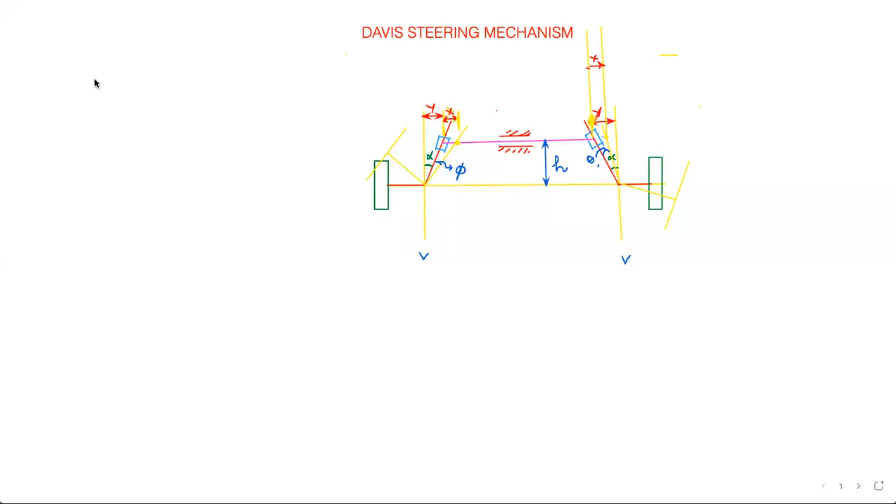So initially we have a few things to consider. Out of those, I will say that tan alpha from the initial condition we can write down right away. Tan alpha is y by h, opposite by adjacent, right? So y by h is tan alpha. Looking at either sides of the wheels, you can make this statement.

And then you should see on the left hand side, with respect to the vertical yellow color line, the final position is alpha plus phi. In terms of angle, the final position is alpha plus phi. I'm just going to make this angle look clear for you from initial to final position, and you call this angle alpha plus phi.

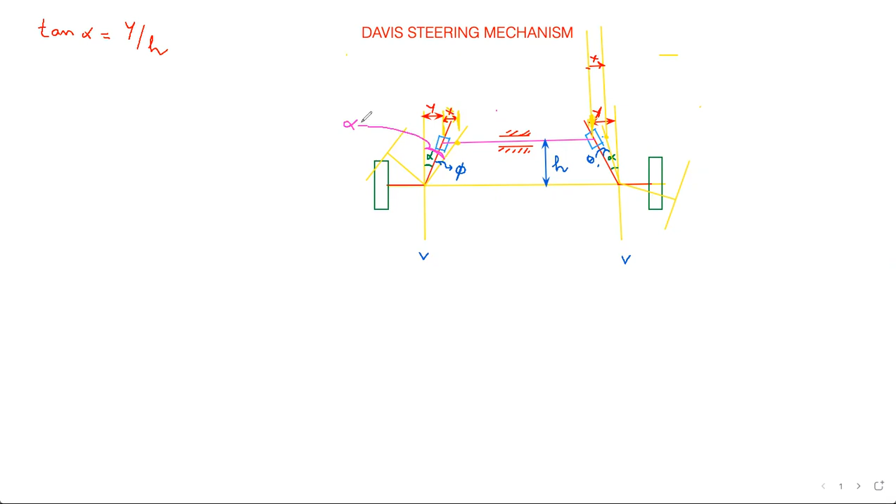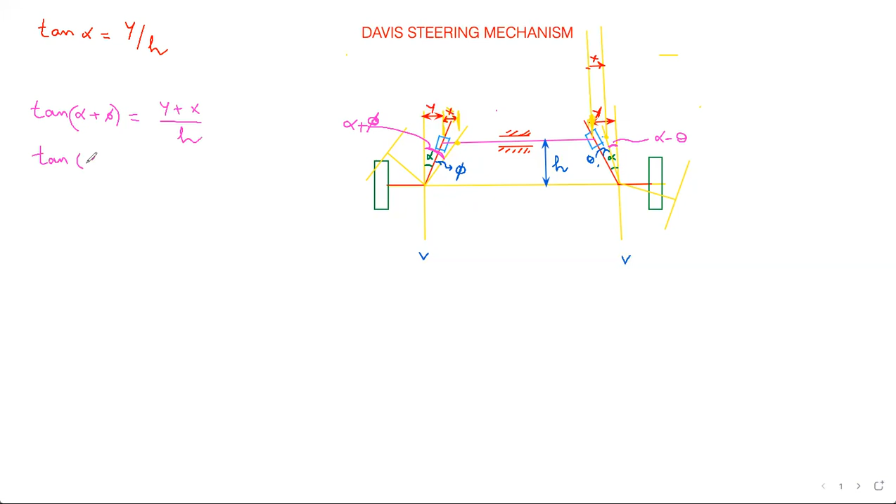And here also, from the vertical to the final position, you call it alpha minus theta, right? So now the next thing to do is tan(alpha plus phi), which is equal to opposite, which is y plus x, divided by h. Similarly, on the other side tan(alpha minus theta) will give you y minus x by h.

Now we are going to do the tan(A minus B) formula. So it will be tan A minus tan B divided by 1 plus tan A tan B, which is equal to y minus x by h.

Now what is tan alpha? From the first case, I have written y by h, right? So right away write y by h minus tan theta divided by 1 plus y by h tan theta, which is equal to y minus x by h.

Now we can do some simplification, and finally I have got this equation as (y minus h tan theta) divided by (h plus y tan theta) is equal to y minus x by h.

By doing some cross multiplication, I can further simplify this equation as yh minus h square tan theta is equal to yh minus xh plus y square tan theta minus xy tan theta. So it is yh and xh, then y square tan theta, then xy tan theta, right? Yes, and now you can see that this gets cancelled out, and all the tan theta terms take to one side.

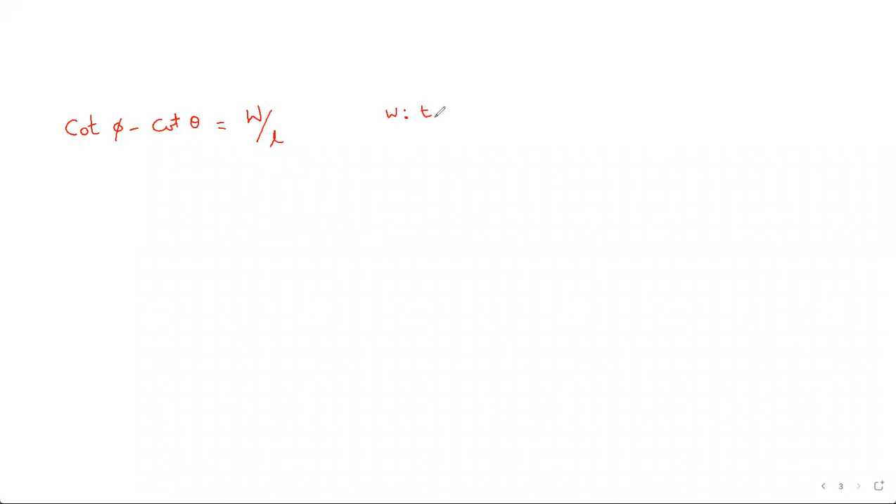And now we are going to compare with the fundamental equation of steering. So we have an equation called the fundamental equation of steering, where the equation states that cot phi minus cot theta should be equal to track width by wheelbase. So W is track width and L is your wheelbase.

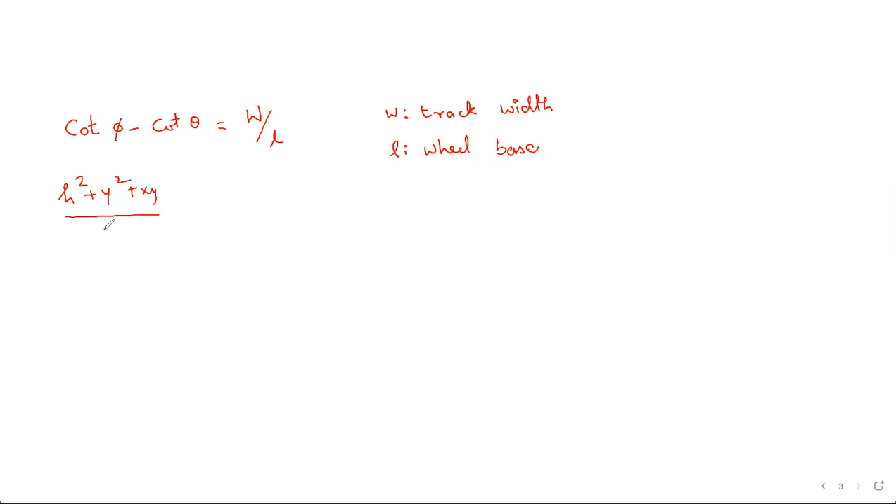So substitute in this whatever we have just done from the derivation. So cot phi is what? We have tan phi. So 1 by tan phi is cot phi, right? So just write down: h square plus y square plus xy divided by xh minus h square plus y square minus xy divided by xh is equal to W by L, right?

So now I think you can cancel out a few things. After multiplying the negative symbol, you will get this cancelled out, and this will become plus. So finally the equation will be like 2 times xy divided by xh is equal to W by L. And here this also gets cancelled out. X gets cancelled out. And what is y by h?

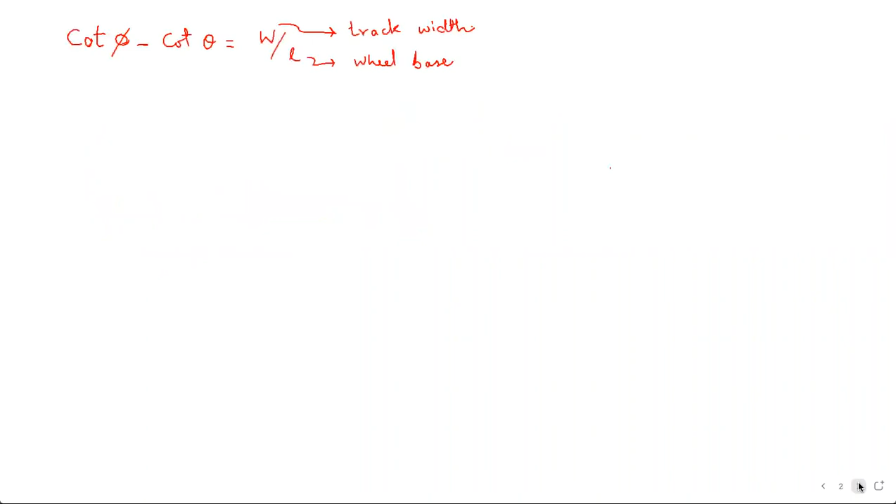Just go to the previous slide. You can see what is y by h. Y by h is tan alpha. So I can write tan alpha is equal to W by 2L. And from this equation, alpha you will get as tan inverse W by 2L.

It means if you know the wheelbase and the track width, you will get the alpha angle which you should initially place. That alpha you are going to get while you are constructing the Davis steering gear mechanism, right?

And usually W by L, the ratio of the track width to the wheelbase, should be between 0.4 and 0.5, and alpha is between 11 degrees and 14 degrees. So these are the standard values which you should be having to satisfy the correct steering in the Davis mechanism.

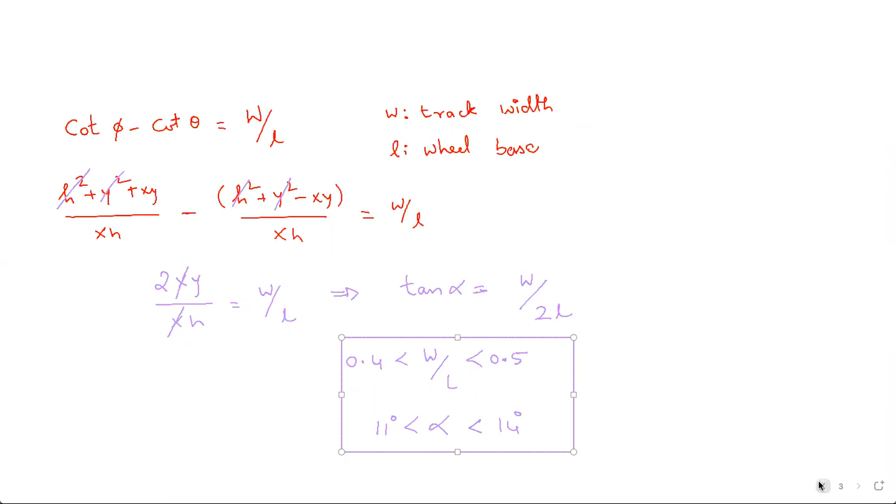And the Davis mechanism has perfect steering in all the configurations. In any configuration, you will have correct steering. And mostly here, because you have sliding pairs, you are going to have more wear in the mechanism. You have two sliding pairs over here, on the left side and on the right side, right?

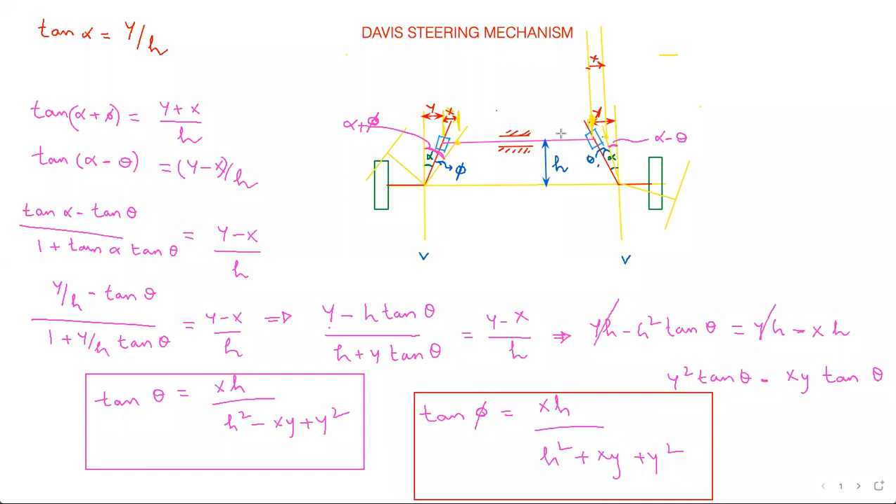So it is going to have more wear and tear, and after a few cycles, you are not going to have correct steering. So better than Davis, you are going to prefer Ackermann steering because it has all revolute pairs. We are not going to prefer this type of steering mechanism due to the wear problem which you are going to face. Okay, thank you.